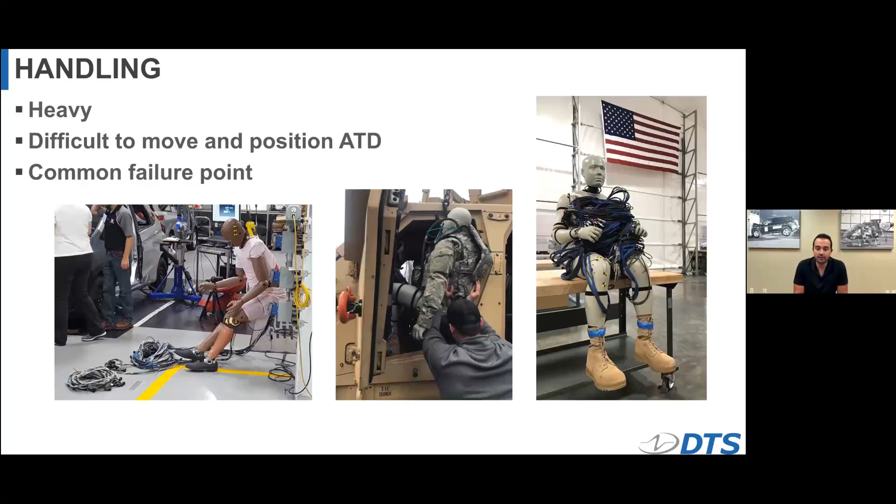Same goes for the THOR and automotive ATDs. It just makes it really difficult all around moving, positioning, and placing the dummy. And the wires end up becoming a failure point because they're dragging on the ground, they might get pinched or stepped on, and it can really cause some issues in your tests.

The next issue is servicing. If you have a channel fail, it's a pretty big process to unravel your entire umbilical, remove all your tape, pull out your one sensor, and then replace it. With an in-dummy solution, it becomes much easier to replace sensors. You end up spending a lot of time on cable management, and a lot of customers end up running redundant channels because they're worried about damaging analog wires in a test.

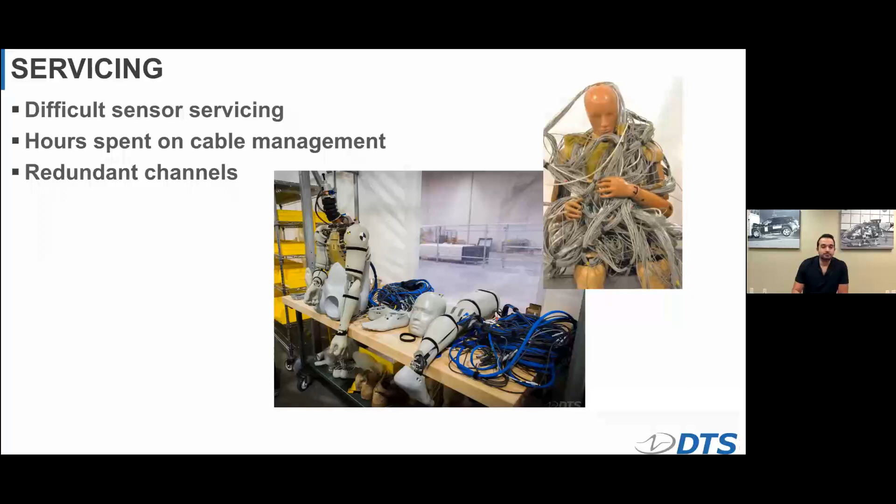And when it comes to your test protocol, we've all seen this mess of wires that you end up dealing with. The wires can end up affecting ATD positioning or kinematics. You'll add hours to your test time. There's risk of data loss because if you cut a wire, your data just stops - there's no chance of it continuing to record that sensor.

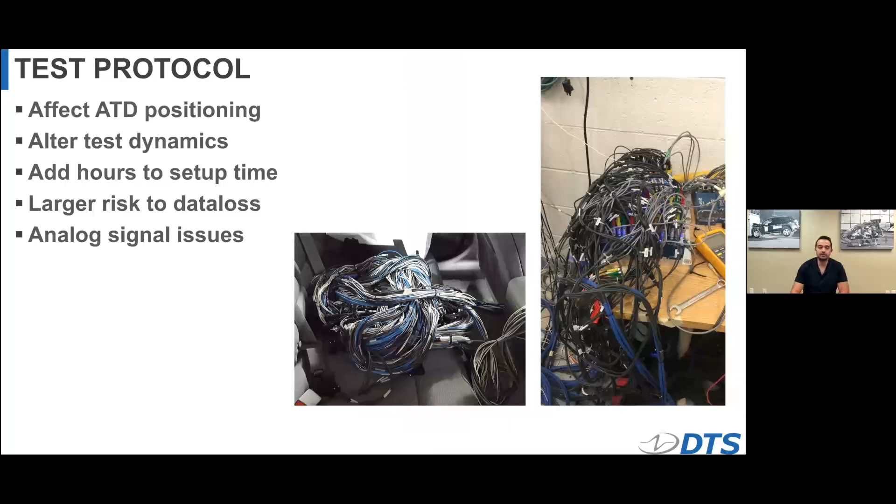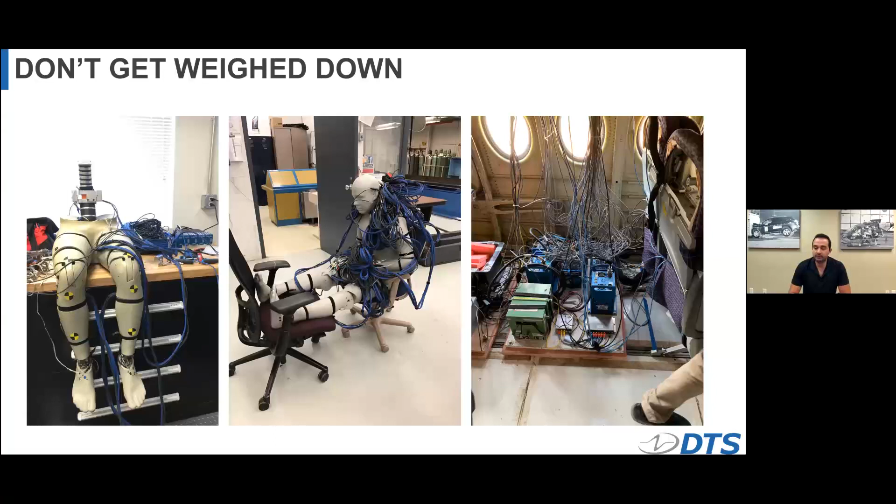And with long cable runs, you can start to run into analog signal issues. So if I haven't driven the point home enough, don't get weighed down by wires - it really can create a lot of trouble. As much as we try to cable manage, it always ends up being difficult. This is the WIAMAN, a 139 channel dummy, very similar to the THOR, and it's a lot of wires to be dealing with. This is another test from one of our customers.

As much as you try, it's really difficult to deal with out-of-dummy systems. So why in-dummy DAS? There's a lot of benefits to in-dummy DAS. You greatly reduce your setup time. One of our big customers, Aberdeen Proving Ground, when they first started using WIAMAN, they noticed a big difference here.

They have their test setup down to the minute, and they know exactly when to bring out the ATDs. They're going to spend 2 hours routing the wires and plugging everything in. I'll never forget the first time we brought out the new WIAMAN with just a single exit cable, and it really helped them. We brought out the dummies, put them in the vehicle, plugged in their one wire, and everyone just kind of stood around - that's it, we're ready to go. Obviously now they've improved their efficiency so they don't waste so much time, but it was a big eye-opener for everybody on just how much time was spent on that.

ATD kinematics are improved when it's not weighed down by wires. You're reducing your risk to data loss, and you're improving your sensor serviceability. If you do end up having an issue, a lot of our customers find that it's a lot easier to just unplug the dummy, pull it out, and put a spare ATD in place. That makes it really easy in the case of a failing sensor or something like that near the test time.

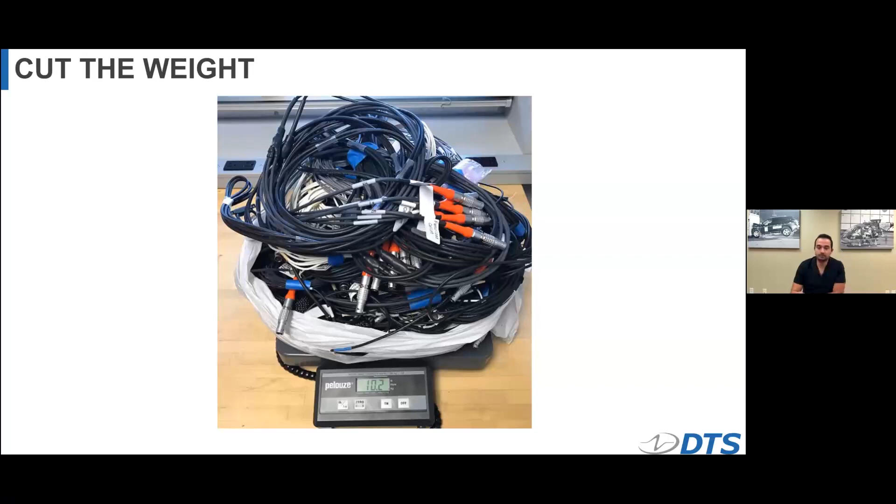So one more point here, just encouraging you to cut the weight. This is 10.2 kilograms of wires and connectors that we cut off a 139 channel THOR. You can see it's really a significant weight savings when you go to in-dummy DAS.

So now we're going to go over the DTS in-dummy solutions. DTS has been in business for 30 years, and 23 of those years we've been working on in-dummy DAS. If you are familiar with DTS, you know that we started with the TDAS G5 in the World SID, and we have Slice Nano for a few dummies and head forms, and we've been an industry leader in crash-worthy data acquisition systems for this entire time. Slice6, our latest data acquisition system, is the pinnacle of our experience and our customer feedback. We take our customer feedback very seriously, and we've collated all that into our designs and methods to make the best product here.

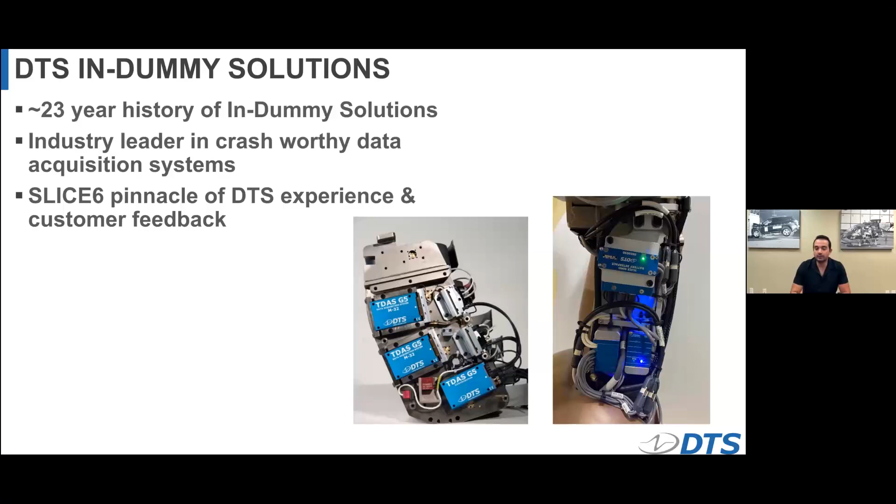So we're going to go into an intro of Slice6. We have a video that I'll share with you, and it's about 6 minutes long. It's down in our ATD lab, so we will get that started right now.

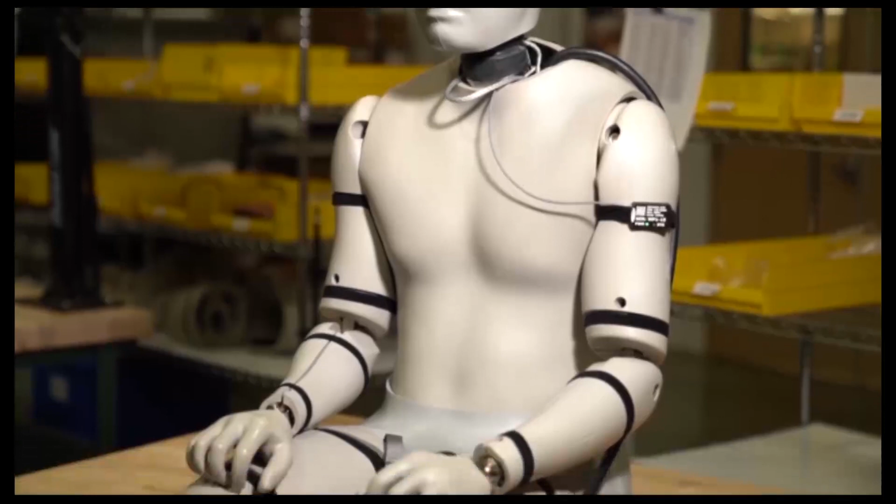Hello, I'm Tamer Abubakr. I'm the ATD Systems Manager here at DTS, and today we have WIAMAN. WIAMAN is the underbody blast dummy that we developed for the U.S. Army, and it was our test bed for developing the Slice6 data acquisition system. We use Slice6 in all of our automotive ATDs now, so today we'll go over some of the features of Slice6, how it works, and how you can use it in your system.

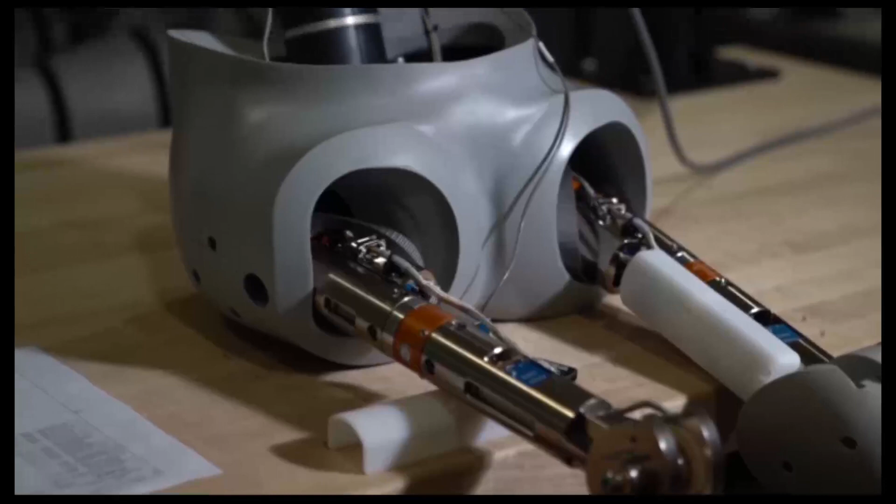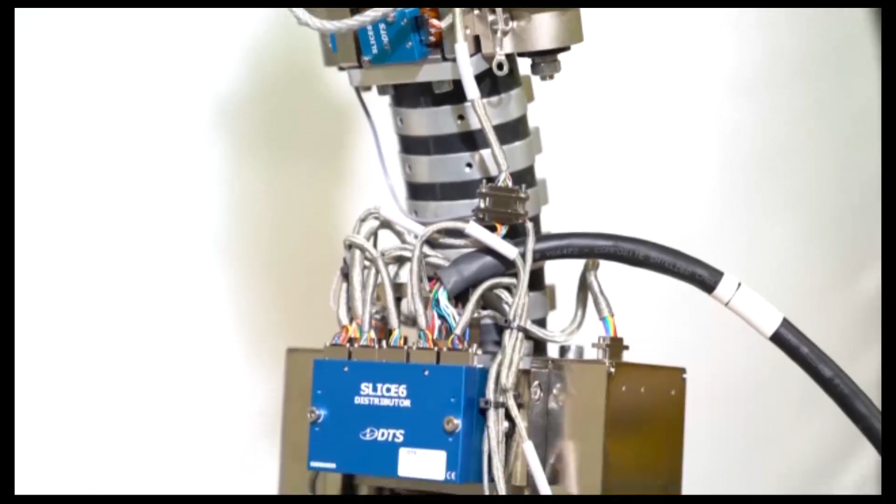Let's take a look underneath the flesh of the WIAMAN and look at the Slice6 data acquisition system. Slice6 is a distributed data acquisition system, which means we have multiple units all throughout the body, and they're not just in one spot in the center of the body. This is a big benefit for a couple reasons. It allows us to bring the data acquisition closer to the analog sensors, virtually eliminating all analog wires except for a few small ones. Another benefit is heat distribution - rather than have all the heat generation in a central location, the distribution of DAS throughout the ATD drastically lowers the overall impact of heating to the dummy.

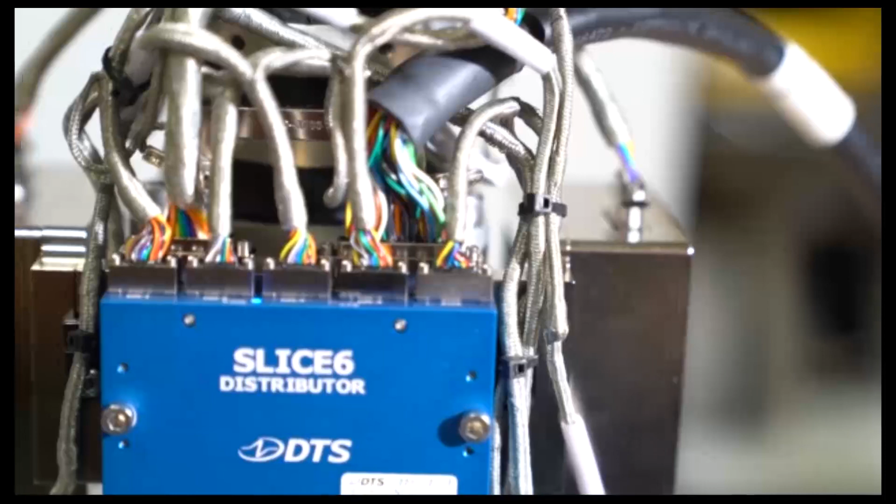You have your Slice6 distributor in the center, which is then connected with cable harnesses to each chain of the ATD. So on WIAMAN, we have a chain that goes up to the head, we have a chain that goes down to the pelvis, and then one chain down each leg. That's very similar to other automotive ATDs like the THOR, the World SID, or the Hybrid 3.

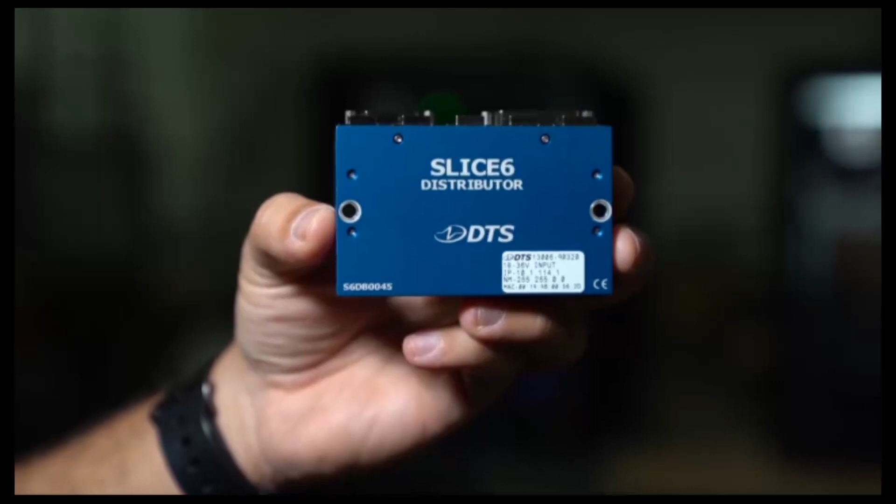This is the Slice6 distributor. It's the main distribution unit for each individual ATD. On the top you have your battery connector that goes to your backup battery power. The up connector goes to your exit cable, and then you have 4 down connectors that go to each chain of the ATD. The auxiliary connector allows you to plug in the temperature sensors and the external LED indicator.

This is our single ATD exit cable. It's slightly larger than an Ethernet cable, and it carries your power, Ethernet, and control signals like event and status. It makes it really easy to set up or break down a test with only a single connector to plug in for each ATD.

Another nice feature about Slice6 is backup battery power. With the Army, we had a really long battery requirement of 2 hours of runtime, so you have these really big batteries on the side here. But with a typical automotive ATD, we get away with a really slimline battery that gives us up to half an hour of runtime, and that protects your data. So if for any reason you lose power to the system, or your cable gets cut, your data acquisition is still recording to flash memory, and all your data is safe and recoverable after the test.

The auxiliary port allows us to plug in a few different items. The first item is the external LED indicator. This replicates the LEDs that are on the Slice6 distributor so that you can easily see them outside the dummy and have access to them during the test.

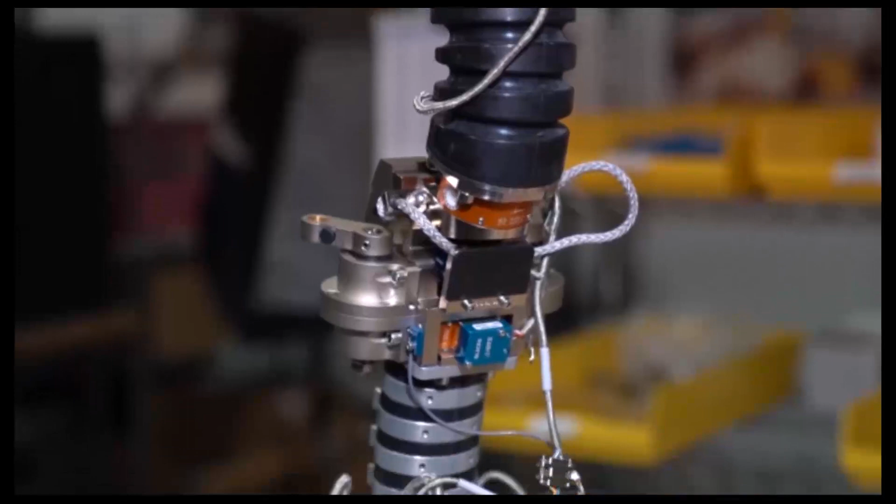The next thing that you can plug in is a temperature sensor. You can plug in up to 4 temperature sensors throughout the ATD. Typical locations are the torso, like this one, on the rib, and in the pelvis, and these allow you to monitor the temperature, take a temperature recording just before the test, and also data log the temperature all the way up until the test. A lot of test requirements these days require at least 4 to 5 hours of logging of the temperature before the test, and this allows you to do that.

Every individual Slice6 can be set up as its own tilt sensor. These settings are user configurable based on the test, with target tilt or how it's mounted in the ATD for different offsets. Our software allows you to configure the Slice6 for a specific location and then get a live view of the tilt measurements so you can use it to position the ATD.

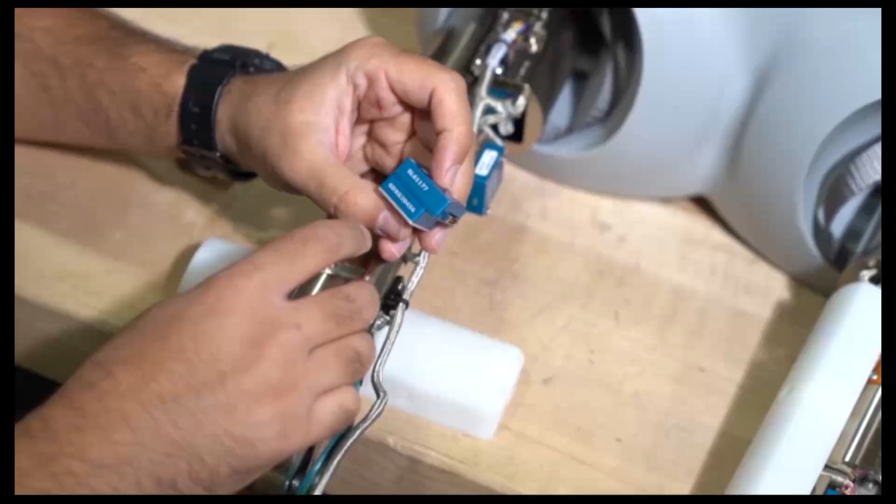Here we have an example of a direct mount to the sensor Slice6 configuration. On the bottom here we have our 60xG2, which is 3 linear accelerometers and 3 angular rate sensors, and that directly attaches to the Slice6. When you take this apart, you can see all the analog signals travel directly through this connector here, so there's no wires at all.

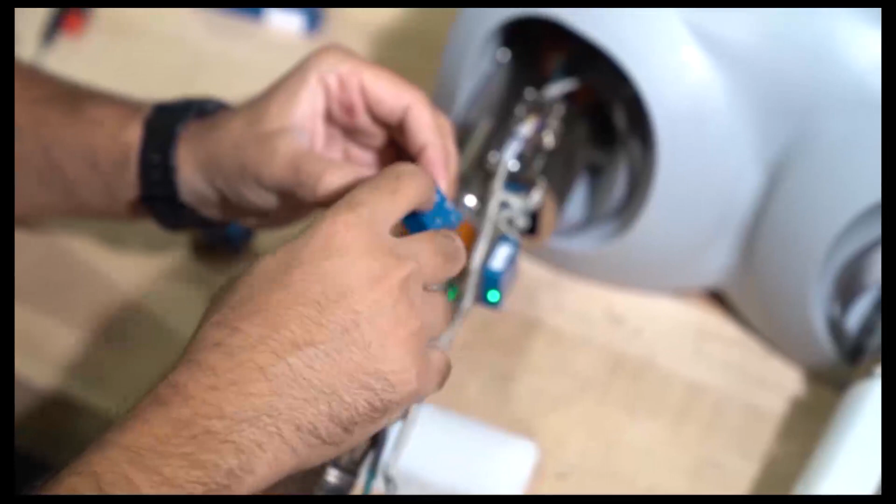After the analog signals pass and get recorded into the Slice6, the Slice6 has 16 gigabytes of flash memory, and that stores directly to this Slice6 unit. So if anywhere along the chain you have a cable cut or power loss, all your data is safe inside the Slice6 and easily recoverable after the test.

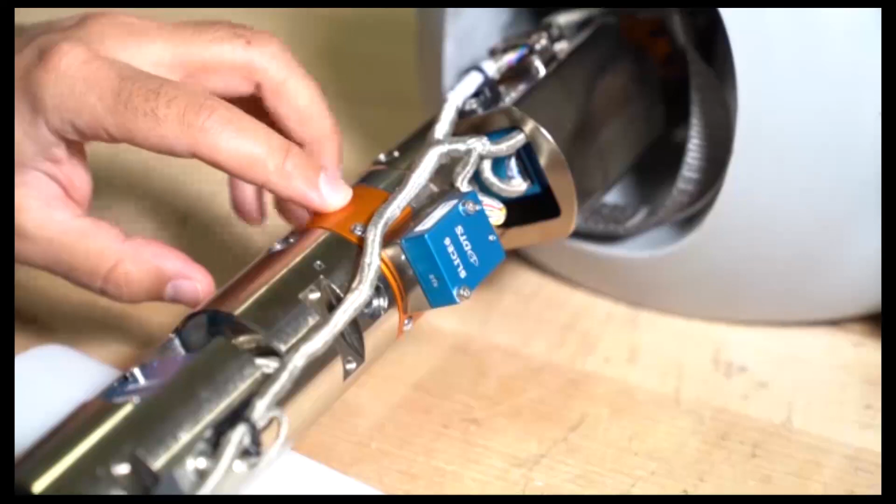Here we have an example of a direct mount load cell. Just like the 60xG2, the Slice6 directly attaches to the load cell, and there's no analog wires at all. These load cells are made by all the major load cell manufacturers, and they're compatible with Slice6.

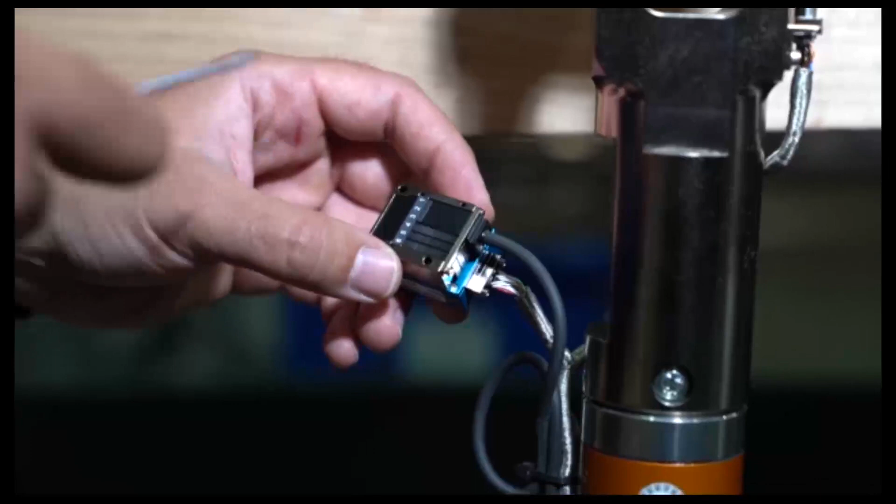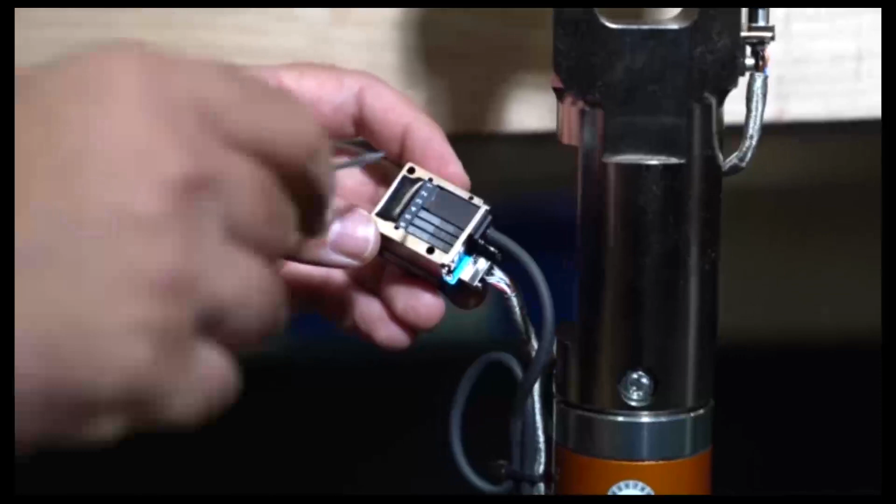Not every ATD sensor application allows us to directly mount the Slice6 to our sensors, so we have this sensor interface option, which is basically an interface device that allows you to plug in wired analog sensors. Here we have an example of a 3-channel load cell plugged into a Slice6, and then we have 3 dummy plugs to fill up the gap. These work really easily.

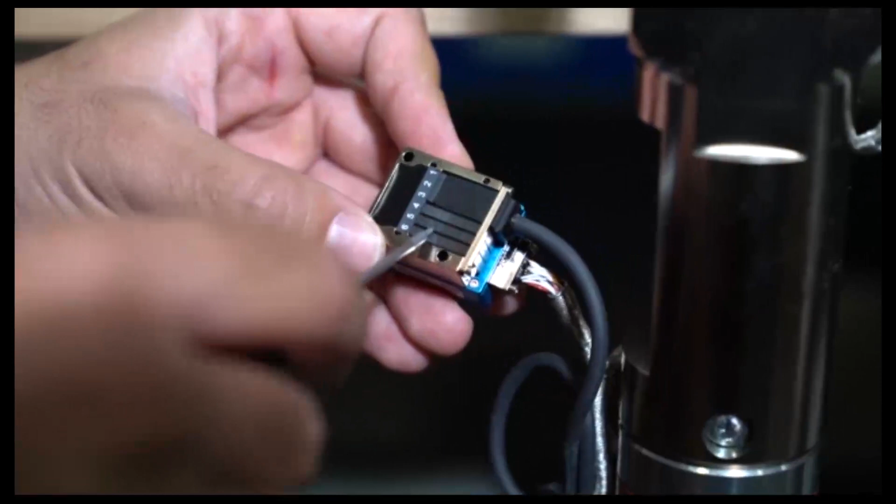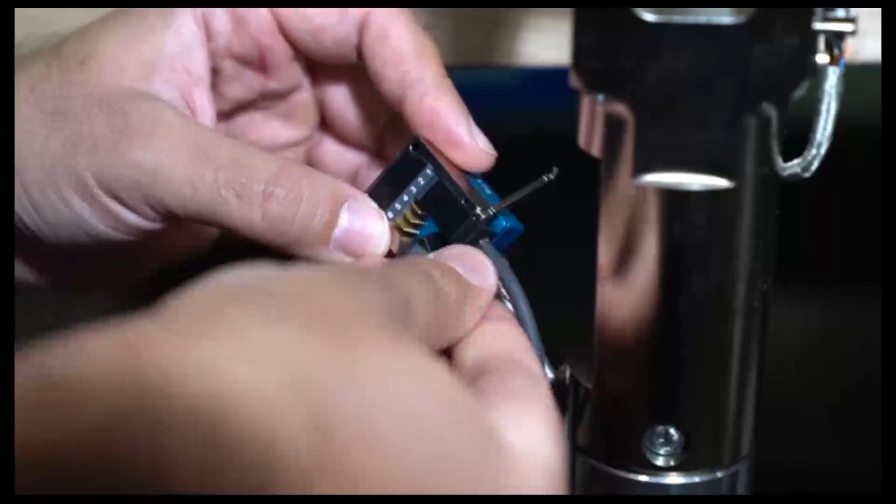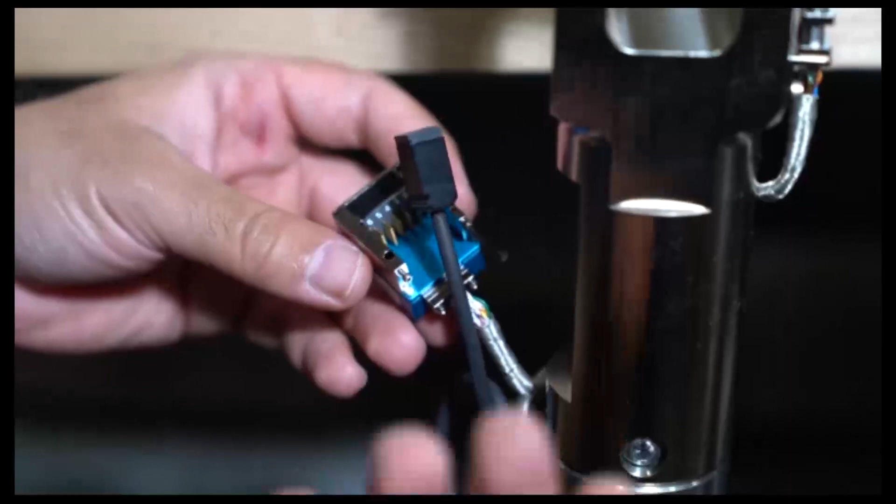We have one small screw that you loosen here, and then this lock bar comes up, and that's what keeps the sensor from falling out. Your dummy plugs will come out, and then you can just pull your sensor out, and now you can remove your sensor, replace it, get it calibrated. After you get your sensor plugged back in, you get your dummy plugs back in, and then you can flip your lock bar over the top and tighten it back down. Now you're secure and ready to test.

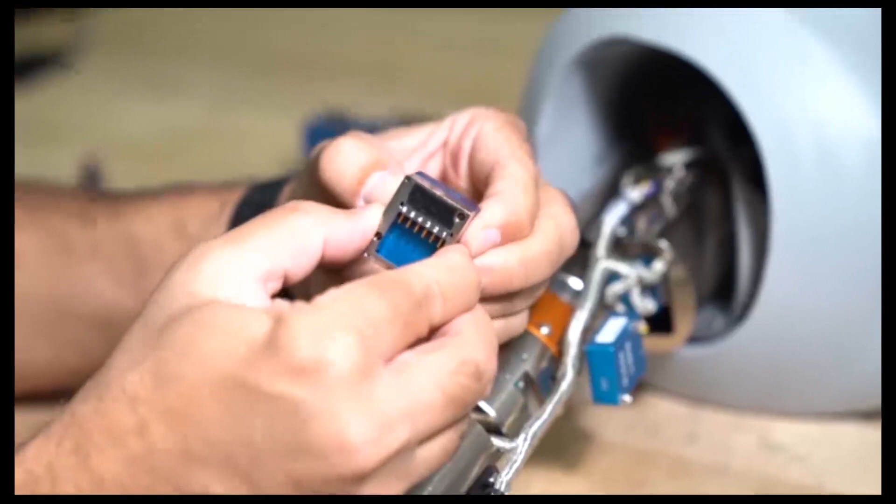So much like the direct mount option, the sensor interface is easily removable from the Slice6 for calibration and replacement.

We have Slice6 designs for almost every ATD out there, whether it's the Hybrid 3 5th, 50th, 95th, THOR, World SID, Euro SID, the list goes on. But any ATD you need integrated, we can do it here at DTS. So that was our intro to Slice6. Slice6 is our latest data acquisition system, and it has a lot of really nice benefits over our old data acquisition systems. It's a really clean distributed design.

So instead of having your data acquisition concentrated in one spot in the dummy, it's distributed and closer to the sensor. That gives us the ability to make really flexible configurations no matter what the ATD that you're trying to integrate is. And it virtually eliminates all analog wires. There are some spots where you have to plug in a sensor, you have to use a wired sensor, you can't directly mount, and typically this is for single axis accelerometers or maybe load cells that aren't 6-axis. But with our sensor interface, it's really easy to do that.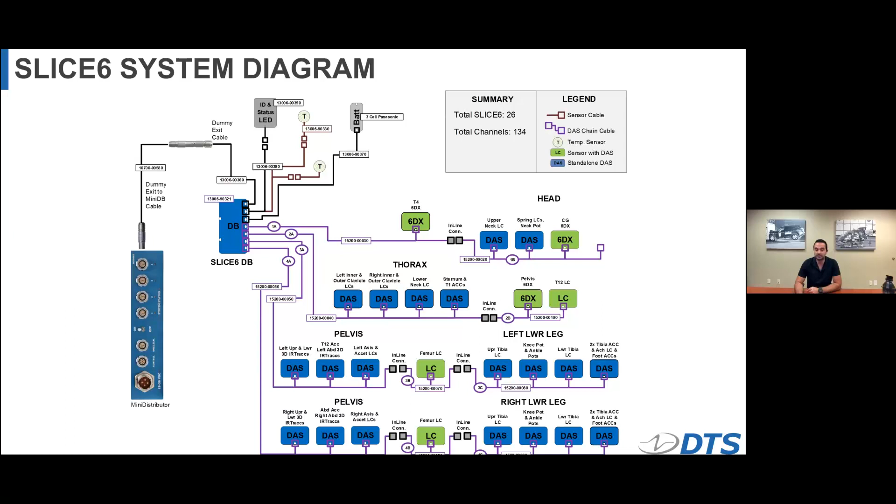So like I said, our Slice6 distributor is the main central point, and you can run up to 4 chains of 10 Slice6, so up to 240 channels. You can have temperature monitoring and logging and backup battery power anywhere from 10 minutes to 2 hours based on your situation.

We also have a single chain adapter. Not every ATD is large enough to accommodate the Slice6 distributor, and it really just doesn't have enough channels to make sense for it. So we developed a single chain adapter where we've been able to chain all the Slice6s in an ATD into a single chain.

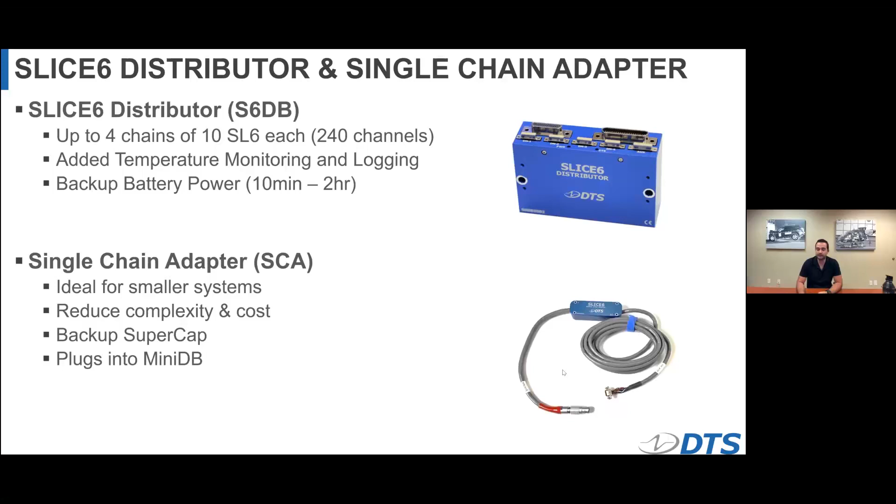And so this blue box right here is actually a supercapacitor that gives you about 2 seconds of backup battery power in the case of your cable being cut. And this also plugs directly into the mini distributor, and you can use it with all of our legacy DTS systems. So some more detail on Slice6.

It's a really small data acquisition system we developed for the Army. It can sample up to 400,000 samples per second, 16-bit ADC. It is a fixed anti-aliasing filter, so you have to decide what filter you want to go with when you order. But we have lots of options to accommodate whatever you need. It's also capable of IEEE 1588 PTP synchronization, although that's not used in automotive testing, so typically you may not need that.

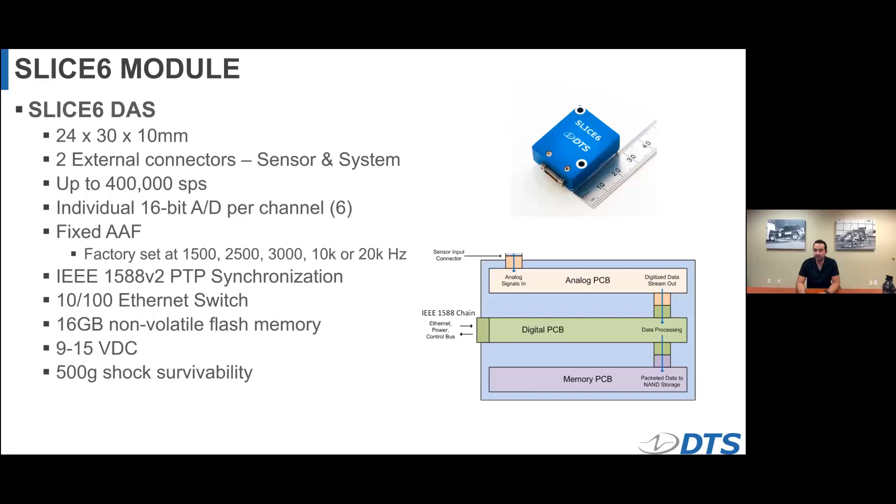Every Slice6 is its own Ethernet device with 2 ports. And we have 16 gigabytes of flash memory on board, 9 to 15 volt power input and 500 G shock survivability. So you can see inside the Slice6, you have your analog board, which connects to your sensor, and then that's connected to the digital board where you get in your power, your control bus, and your Ethernet, and then we have a separate memory board for storage.

So through this Nano D port on the side is where you plug into the system. So that's where you get your Ethernet, your power, and your control signals, like the event, status, and start record. So you can run Slice6 individually by itself, you can daisy chain them together, or you can run a distributed system with the Slice6 distributor or the single chain adapter throughout the dummy.

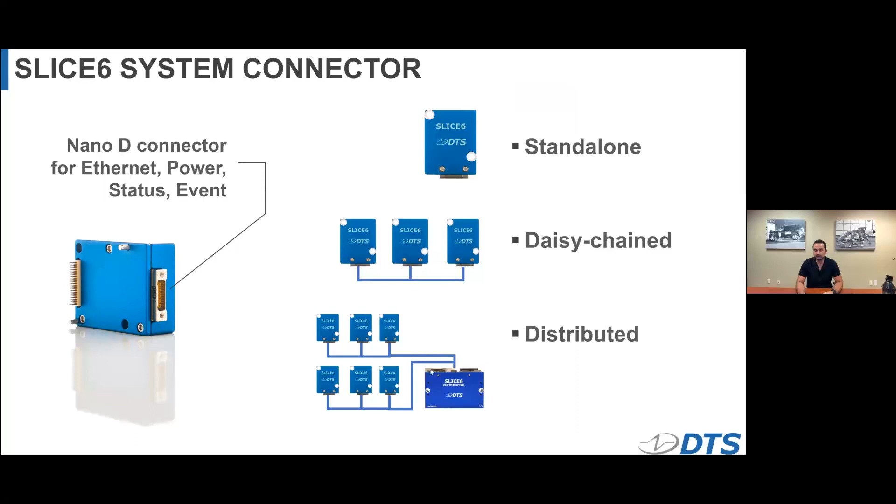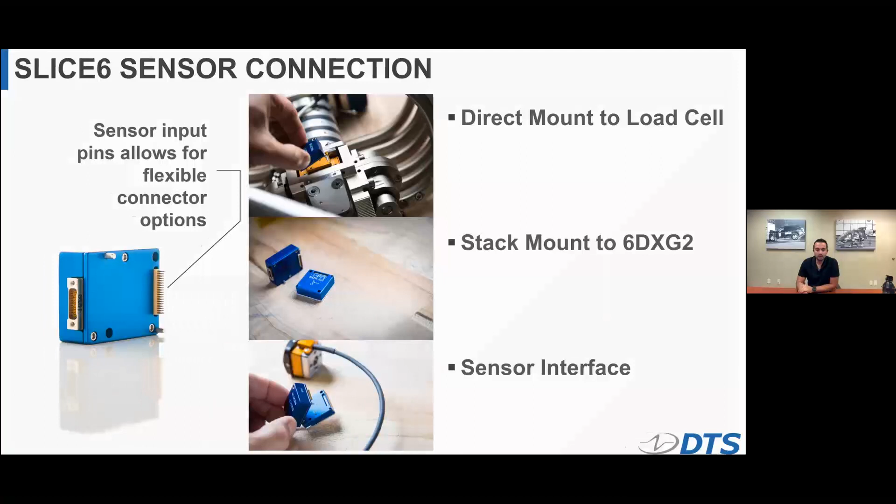The sensor input can be plugged in 3 different ways. So you can either plug in directly to a load cell, directly to a 6DXG2, or a sensor interface. We went through these in the video, so I won't spend too much time on that, but the direct mount to the load cell is an option. All the major load cell manufacturers support this option. So if you would like to do it on a 6-channel load cell, you can do it. The other option is a 6DXG2, which is another great option.

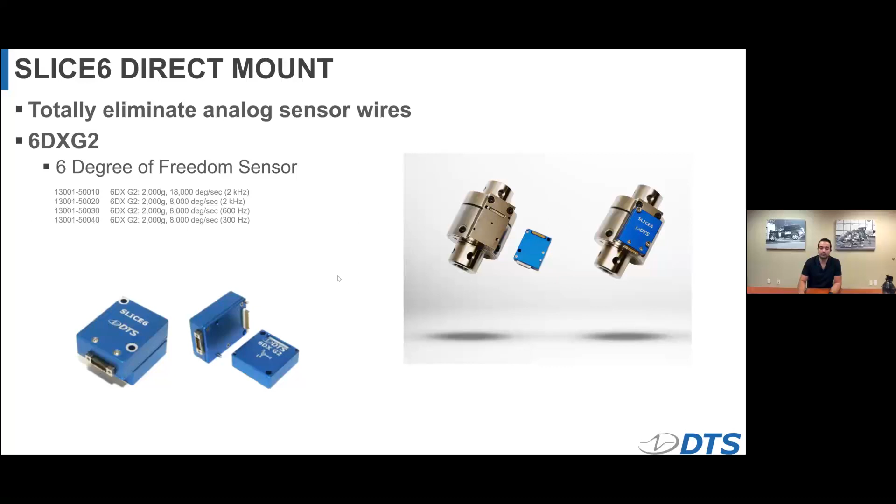Sometimes in the head, or in certain areas, you may run 3 accelerometers or 1 or 2 angular rate sensors, and sometimes it just makes sense to move up to the 6DXG2 and run all 6 channels just to clean up the system a little bit. And then the sensor interface option allows you to plug in any 1, 2, or 3 channel sensor directly to the Slice6.

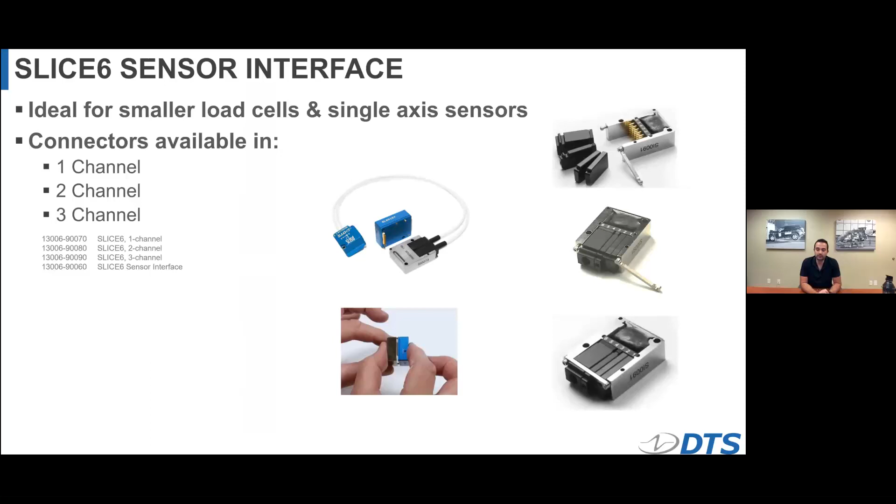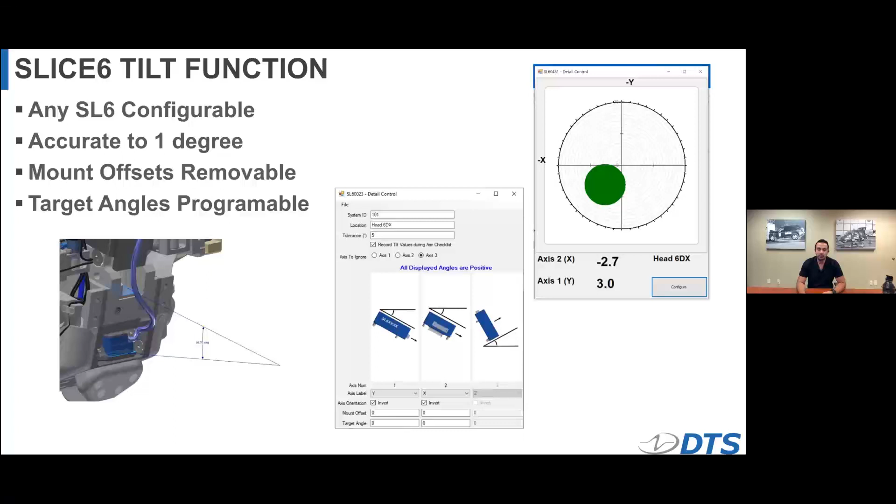And then we also have temperature monitoring and logging. So you can run up to 4 temperature sensors. Our software allows you to log it, so you can monitor it. You can check your table in the software, and then you can also export it to a CSV later if you need to have the raw data.

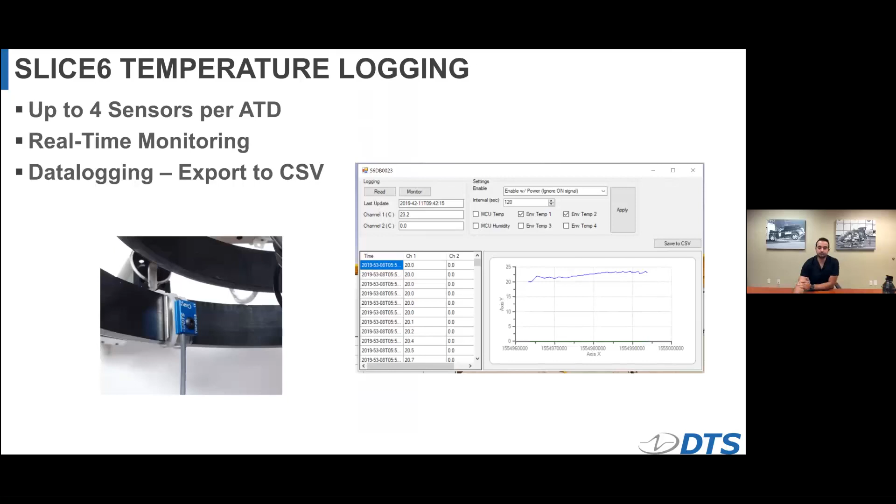A couple other accessories to look at. We have a Slice6 cable adapter, which plugs onto the top of a load cell or a 6DXG2, and it goes to LEMO or Tajimi connectors, and it's just a way to be able to calibrate or service your load cell or 6DX, or use it outside the ATD if you wanted to use it with a different system.

And then we have sensor adapters that allow you to plug in directly to those external sensors, and then those also go to LEMO or Tajimi connectors, and that's just another way to use your sensor directly if you need to use it outside of the dummy.

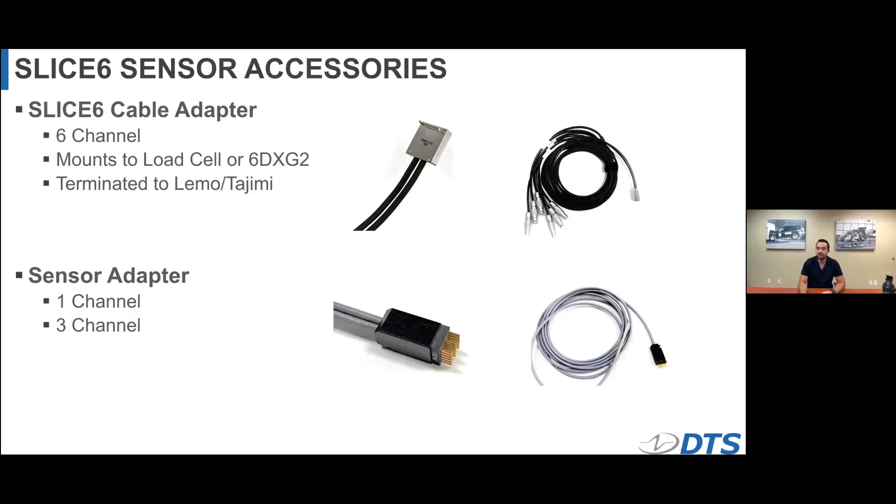So I'd like to get into our Slice6 designs. A lot of our customers who started moving to Slice6 really noticed the benefits and started asking for other ATDs, even the older ATDs. So we've really pushed to make a design for every ATD out there, and if we don't have it complete, we're working on it, and it will be complete soon. So if there's something you're interested in, definitely let us know. We'll let you know what the status is, or we can prioritize something that you may be interested in.

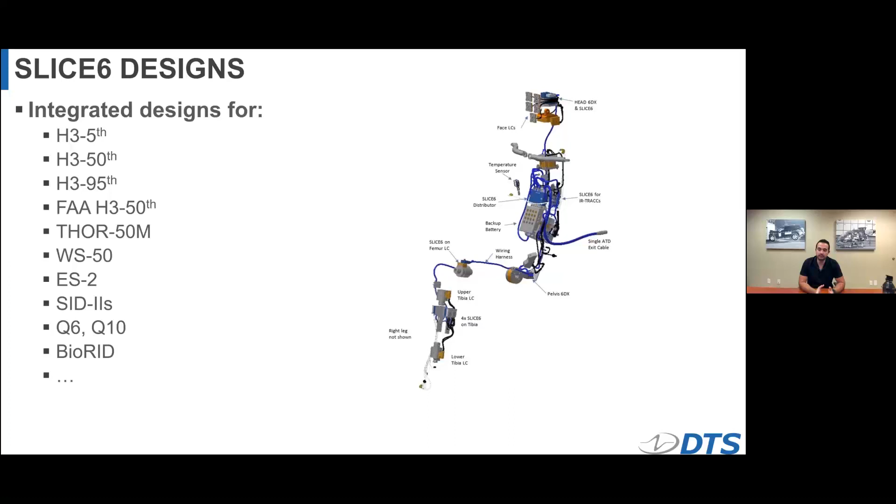And we do share designs with the major dummy manufacturers, so all the designs should be the same whether you're ordering from us or from somebody else. This is an example of the THOR system. You can see that the cable harness runs through the system with all the sensors and the sensor wires. And we try really carefully to make sure we're not upsetting the mass and CG of the ATDs. So we will make holes and modifications in the ATD, or we'll adjust the ballast weights so that we're maintaining the integrity of the original design of the ATD.

So I'm going to run through a couple of the designs that we have. The THOR was the first design that we went through after WIAMan, so we have a lot of experience with that one. That design is very mature. But now we're starting to move on to the other ATDs. So I'm just going to run through a couple of them just to give you an idea of what's in process and what's on the way.

We are design complete on WorldSID, and our first customer is going to take delivery of one in September. So you can see with WorldSID, we tried really hard to maintain the original use case of the WorldSID, where all of the sensor wires are coming up to the center here. So all the Slice6 are attached to this back plane, and it makes it really easy to plug them all in.

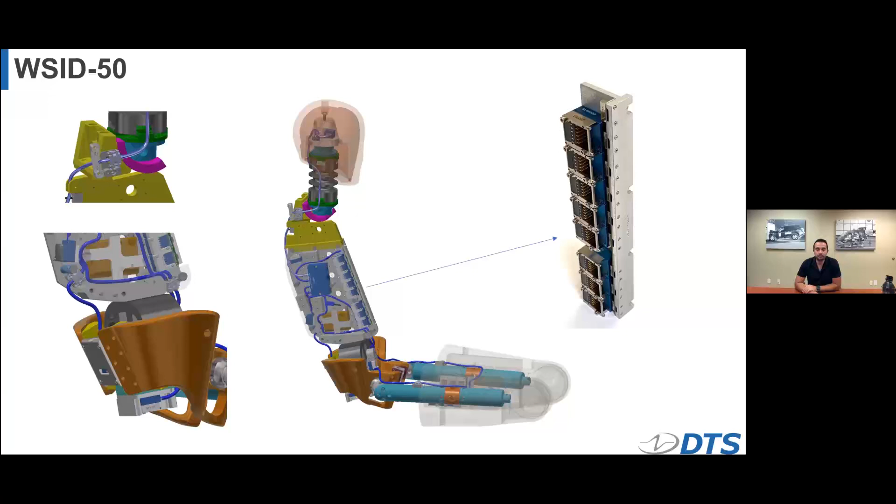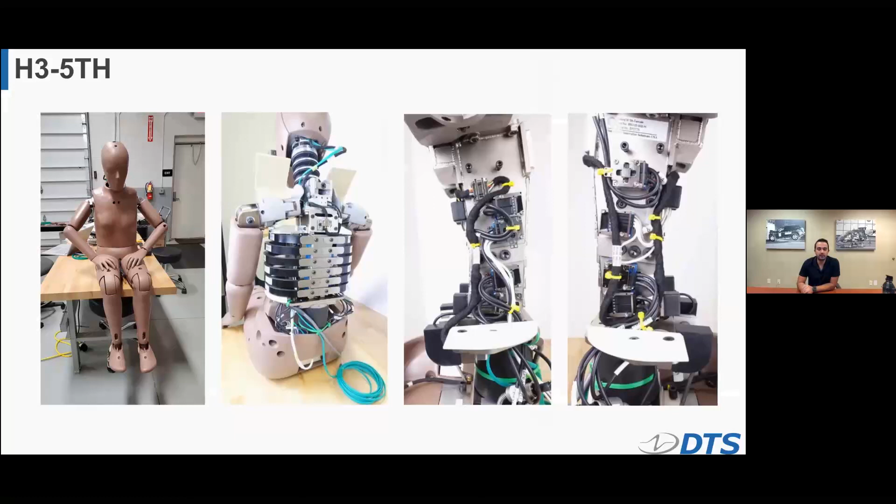We also delivered two Hybrid III 5ths to IIHS just recently. This is another really nice clean design. You can see here, I believe these are around 50 or 60 channels with some femur channels. So this design is also complete and ready to go. The Hybrid III 50th is also design complete, and we'll be building a few of these here shortly.

And then we're also working on the Q dummies. This is just an example of the Q10. If you know the Q dummies, you know they're really small and tight and they don't have a lot of room. But with SLICE6 being so small and distributed, we were able to fit these in where we need to fit them and plug in all the channels.

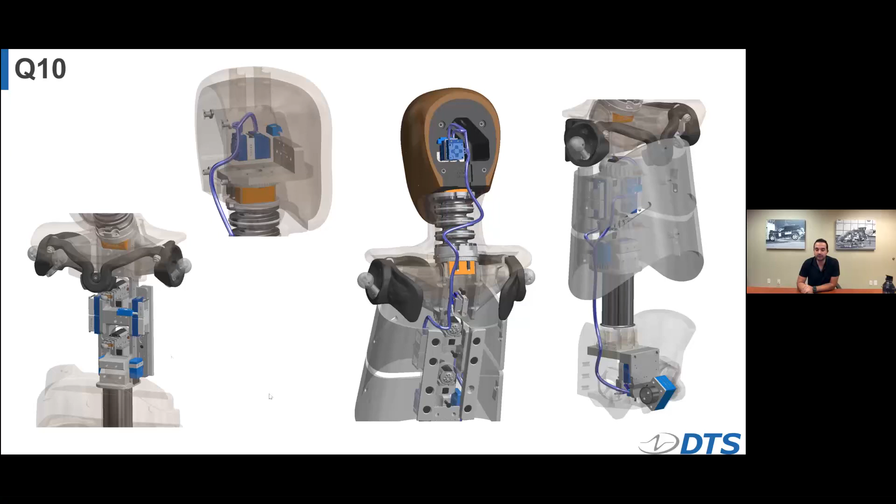So we do have some other data acquisition options. If you're familiar with DTS, you know we do SLICE NANO and G5. We're really pushing everybody to move towards SLICE6 because there's a lot of efficiencies in running the same data acquisition system in all your ATDs. You can have the same spare DAS, you can have the same spare sensors. We try really hard to make sure that all our sensor wire lengths are cut to similar lengths so that you only have to stock a few different lengths of sensors so that you can easily swap them out if you need to.

But our SLICE NANO system does work really well for the free motion headform, the pedestrian headform, the legforms, and they've been really popular with that. A lot of the legforms and headforms have been sold with SLICE NANO, and it makes it really easy to run these tests with them.

So DTS does offer integration services. When you send us your ATD, it doesn't matter if it's a 30-year-old ATD or a brand new ATD. We can take it in and convert it to SLICE6 for you. Typically we'll bring it in, we'll do an inspection and inventory. We can recommend replacing any worn or damaged parts. Then we'll take the sensors, cut them to length, and rewire them. We'll recalibrate any sensors that need to be recalibrated.

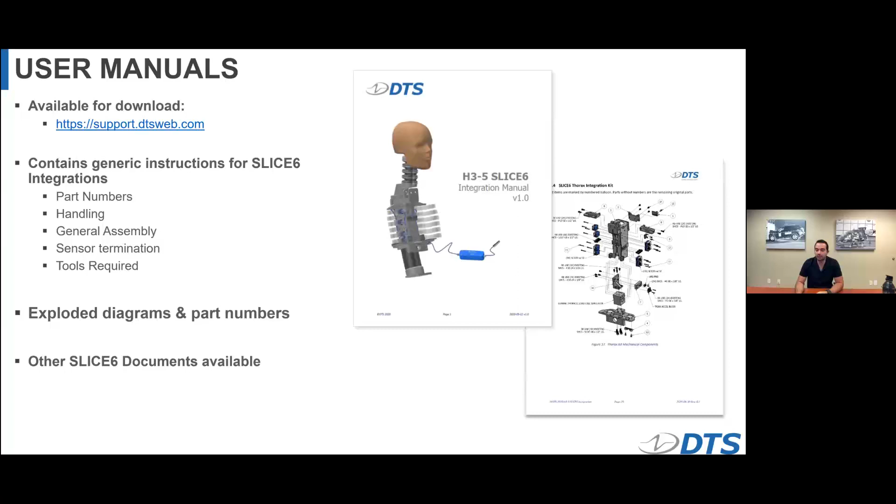Whether you want to do it yourself or not, we do have really nice integration manuals for each design. These include exploded diagrams, and these are all available on our support site. So you have exploded diagrams and all the part numbers, where everything plugs in, and your configuration diagrams. You can see that was the 5th, this is the 50th.

It makes it really easy if you need to replace a part or figure out what screw goes where or how the DAS is mounted. It's just a nice document of how your system is set up, and it makes it really easy to do the integration yourself if you wanted to.

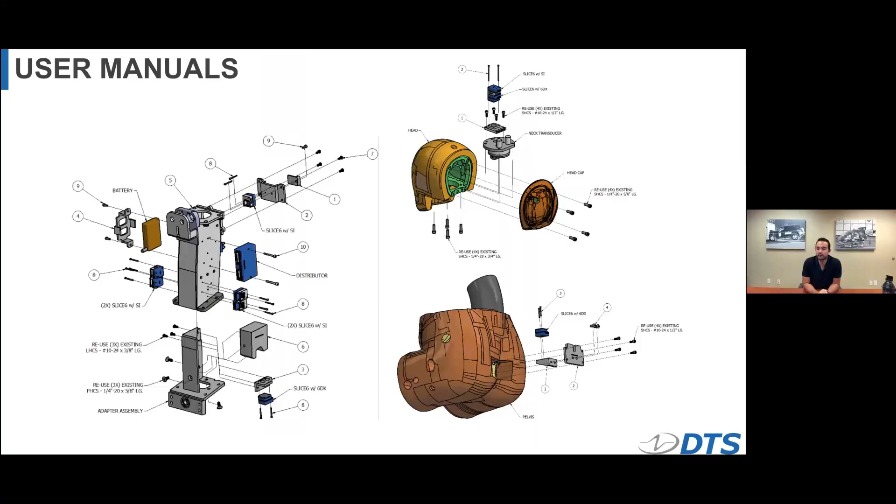We integrated this THOR with Slice6 for them. We shipped it out, and then I met them out there, and we immediately tore it down all the way down to the bones. And it's a really great way for customers to learn.

There's nothing like hands-on experience. You can page through a manual, but really taking it apart and having the confidence that a trained person like myself is there to help guide you along the way really helps give you confidence in your technician's confidence.

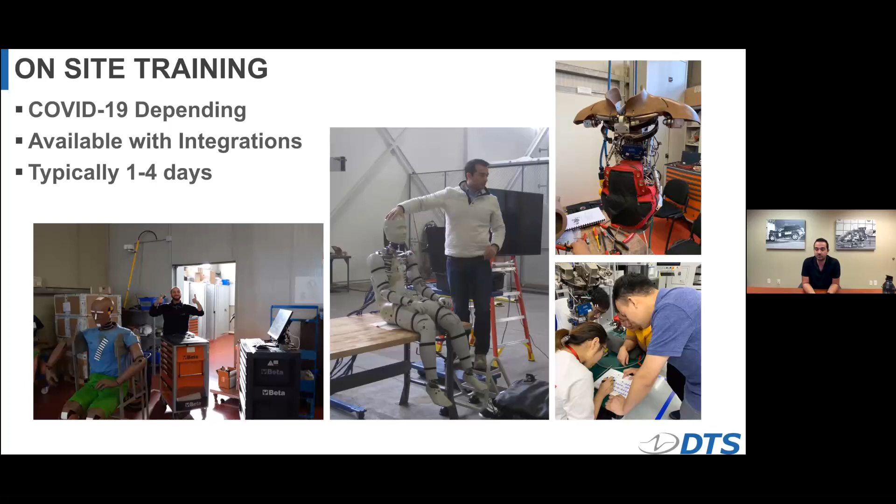So typically, depending on what your system is, we'll plan for 1 to 4 days of training. And it's a really great way to get jump started and get confident in your new system.

So just to review a few key takeaways, in-dummy DAS is really the future. There's a lot of nice benefits that come with it. And the gained efficiencies pay dividends and reduce risk.

You're really lowering the risk of losing your data, and you can gain a lot of efficiencies in your capital investment by being able to run multiple tests a day and not wasting so much time on sensor routing and wiring that you may be spending right now. And obviously DTS can handle all of your DAS needs.

If you need anything, any ATDs integrated or other systems, just let us know and we can help you out.

So how to contact us if you have any technical questions or you want a sales quote or discuss what system might work for you, you can always come to me. I'm open to any technical questions. Chad is our good source for US automotive sales, so come to him with any questions.

And then Reiner is our international sales manager, so you can go to him with any questions or systems you wanted quoted. But of course, if you already have somebody at DTS you're comfortable talking to, feel free to go to them, and they'll make sure your message gets to the right person.

So just another reminder about our help center. You can log on there. You can download any of these manuals right now if you wanted to, just to check them out, see what our designs look like and what you might be getting into. And you can always submit a ticket or a help request directly from our website or from our support site.